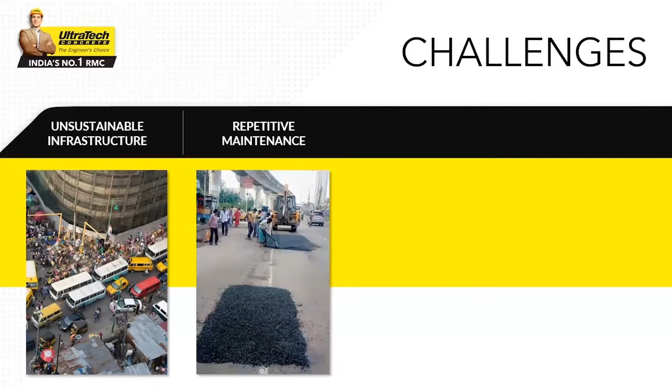But before we go there, let's understand some of the challenges, particularly those pertaining to construction. As we build our cities and maintain them, some challenges relate to sustainability, something we are all concerned about as a community. Our carbon emissions, the pollution we create as we build and live, are important considerations. We must build in a sustainable manner, not deplete our resources, and we must reuse and recycle. Sustainability becomes a prime focus.

But also we need to avoid repetitive maintenance. When construction work or a structure deteriorates prematurely, it causes performance issues and inconvenience to people using the buildings and infrastructure, and it drains a lot of cost into repair and maintenance. Also, apart from building strong, what we build in terms of structures, buildings and infrastructure needs to be functionally good and pleasant to the eyes.

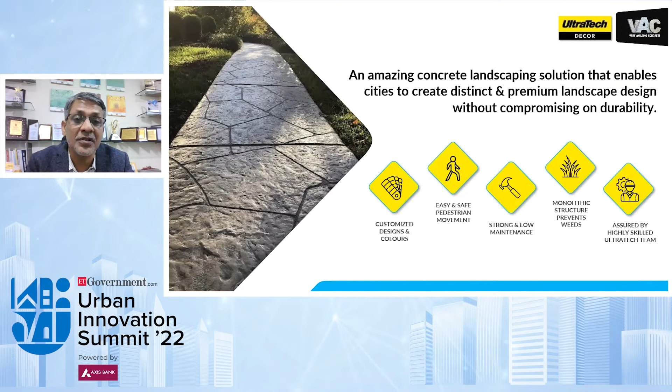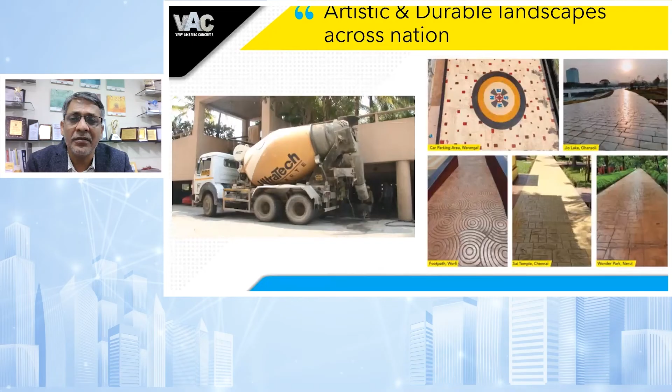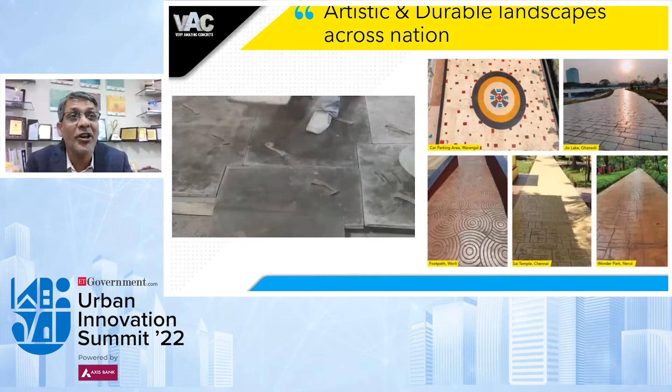So what's the alternative? The alternative from the very amazing concrete bouquet is stamped concrete, an imprinted concrete which promises to be durable with a much longer life. It is imprinted in all sorts of wonderful colors and designs right when it is being laid. As a result, you have a lot of flexibility in designing, a lot of colors possible. We can render the space very beautiful, but all of this also comes with the assurance that this aesthetic will last for a very long time.

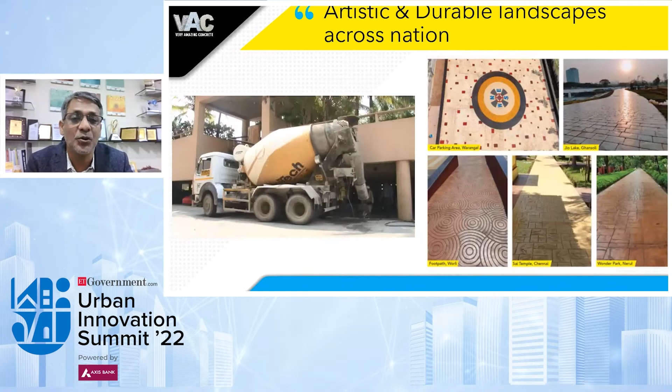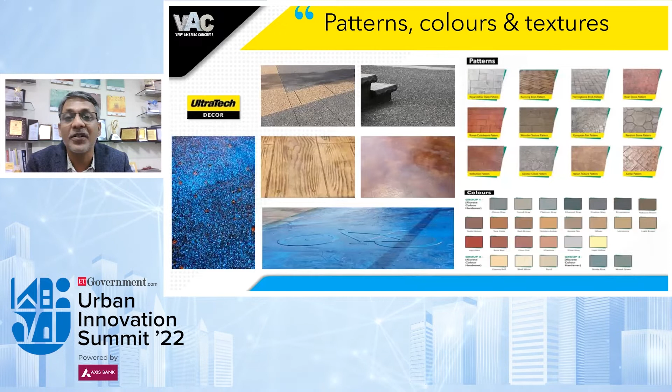Here are some pictures of lakeside beautifications, parks, and footpaths done using UltraTech Decor, which is a stamped concrete in principle, with lots of colors and shades. I know our colleagues and friends in the architecture and landscaping field like experimenting, imagining a beautiful surrounding and landscape, and this shows the number of alternatives available in terms of shades, colors, etc.

There are quite many to give that flexibility. Coming to another material, which is an alternative to flooring in commercial, community buildings, etc. Now, what's so different about this alternative? This is UltraTech Maxsheen Polished Concrete floors.

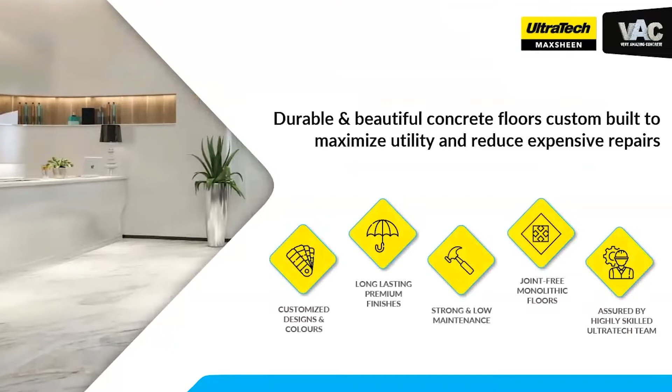What polished concrete floors basically do is produce a floor by treating the concrete surface, enhancing its features. A normal concrete floor, using a chemical process called densification and a physical process called polishing and buffing, is rendered very reflective, dust-free, and it almost looks like tiles or marble, etc. It's an equivalent to that.

But what it also brings along with it, there are hardly any joints. Lots of color combinations are possible, giving the possibility to play with many colors and designs. And all of it comes coupled with the life of concrete. Concrete typically lives 25 to 30 odd years, much more if it is designed and protected well. These floors end up living that long with very high functionality, and of course very good aesthetics.

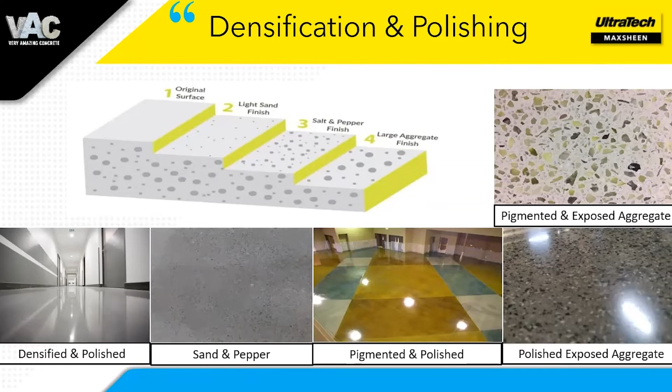Then we come to the realm of facades. We have public utility buildings, lots of buildings in the city. Our cities are basically filled with what some people call concrete jungles - we would rather not have it that way, but we have buildings all over. Buildings have facades, the envelope, and that envelope performs certain functions, but it is also the cityscape we look at day in and day out.

It is important to use materials for these facades which are environment friendly, safe, fire resistant, perform well, and last a very long time. Now, UltraTech DuraFacaD is a very innovative material made of ultra high performance concrete, a new variety of concrete in the country itself.

It has a very high compressive strength of 150 MPa, which allows the architect to imagine a facade element much thinner compared to regular concrete or GRC facades. It gives the benefit of much lower dead weight, but these are functional benefits. First of all, being a flowing concrete material, it allows a designer to design all sorts of customized shapes and figures, giving the building envelope all the creativity required to make the building look good.

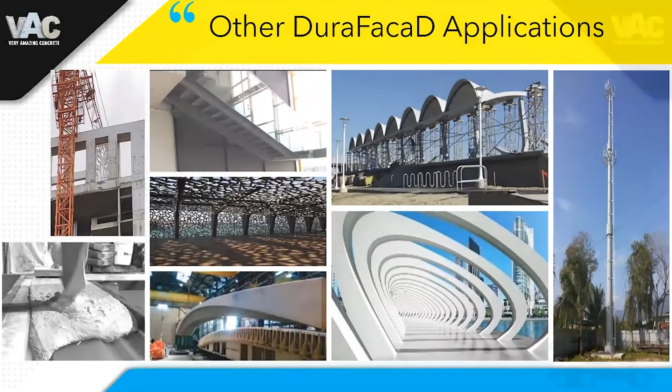Coming to another material, which is UltraTech Dura Pervious. Now, pervious concrete is another innovative variety of concrete. We are all used to talking about concrete as an impervious material, concrete which can render waterproofing, concrete which can prevent dampness, etc. But here we are talking about a concrete which allows water to percolate.

So it's not magic, it's science, it's engineering. We can have your driveway done with this kind of concrete, and it will allow water to percolate into the Mother Earth. We are living in a world where water is an important resource and we can't afford to waste it. We can't allow water which needs to go into the ground to go into the drains instead.

So pervious concrete complements that. It complements rainwater harvesting, it is very environment friendly, and it basically prevents water stagnation. It reduces the load on the drainage system of the city or the complex in which it is being used. So that is about pervious concrete. We need a lot of fillers.

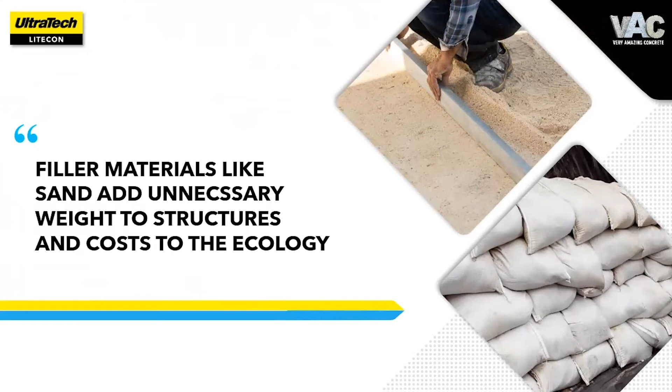Now sand is again a scarce resource and we can't afford to use it. It also causes an undue dead load on the building. So here is a solution called lightweight concrete, which allows the filling to happen. It can be used as a very smart filler, allowing you to fill spaces, gardens, slabs, etc., without increasing the dead weight so much.

And it's a very efficient, environmental friendly material to use. Added to that, it adds thermal resistance, so your building can be smarter in terms of thermal performance.

The last one I'll quickly refer to is rapid - a rapid hardening concrete which develops strength very fast. Now, we do all sorts of repairs, and repairs are going to come. Though with the solutions we're talking about we must try to reduce our maintenance cycles and make structures durable. However, whenever repair opportunities come, we must figure out a way to repair fast, to ensure the timeline between start of repair and opening up of the structure is fast.

Whether it is roads, potholes, airports, whatever we are talking about - that's where a material like UltraTech Rapid can be very, very helpful.

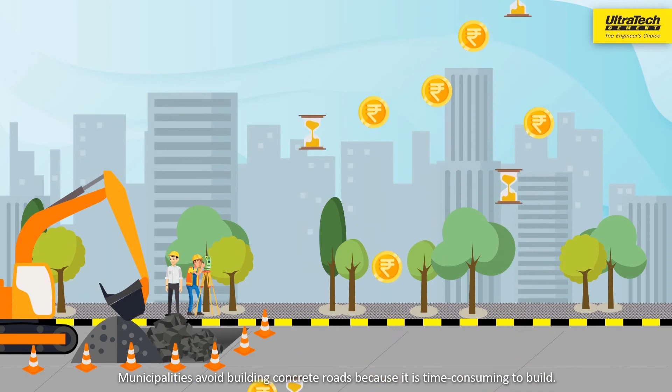Heavy traffic and our weather ensure that roads get damaged in no time. Municipalities avoid building concrete roads because it is time-consuming to build. Rahul, like many of us, has resentfully accepted that bad roads are a reality of life.

Now, what if we promised you a smooth commute with fewer jams and less pollution each day for the next 20 years? Too good to be true? Introducing a revolutionary and convenient solution for achieving world-class, zero-pothole city roads: white topping.

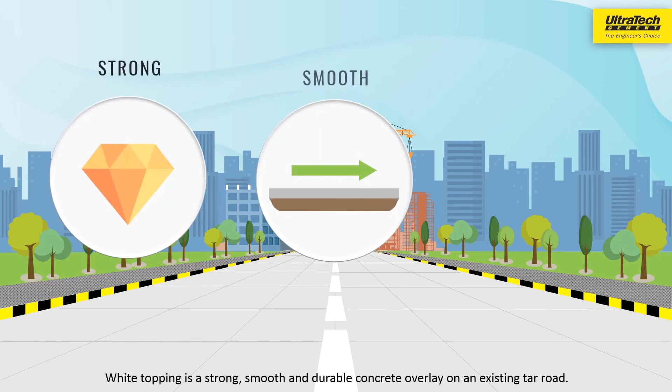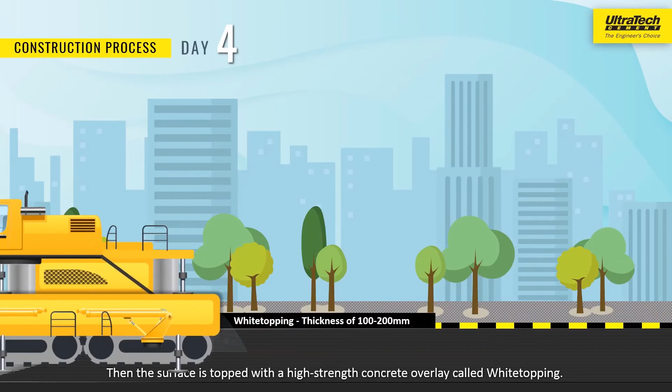White topping is a strong, smooth and durable concrete overlay on an existing tar road. The top layer of existing tar road is removed and cleared. Then the surface is topped with a high-strength concrete overlay called white topping. The surface is textured and grooves are cut into it. It is then cured over the next few days to give it strength before being opened to traffic.

The entire process takes just 2 weeks - a minuscule inconvenience for 20 years of safer and faster commutes. Even after 20 years of service, white-topped roads do not develop rutting and potholes, providing comfortable rides. The textured white-topped surface provides superior traction and braking in both wet and dry conditions, and at night it reflects more light, enhancing visibility and safety.

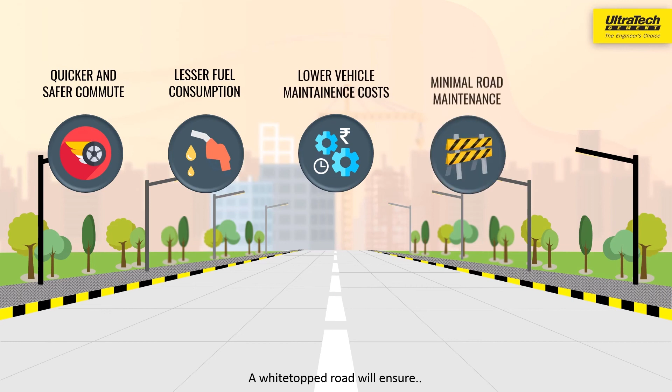A white-topped road will ensure quicker and safer commute, lesser fuel consumption, lower vehicle maintenance costs, minimal road maintenance, and future-ready first-world roads. Timely commute ensures that Rahul enjoys a better quality of life every day. Just as white topping has transformed Rahul's life, it is transforming cities and the lives of millions of citizens across India. Know your road. Know white topping is the best for you.